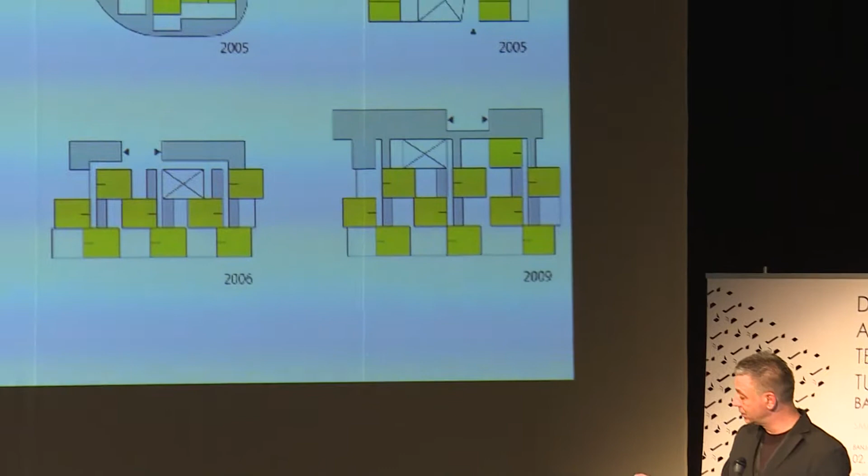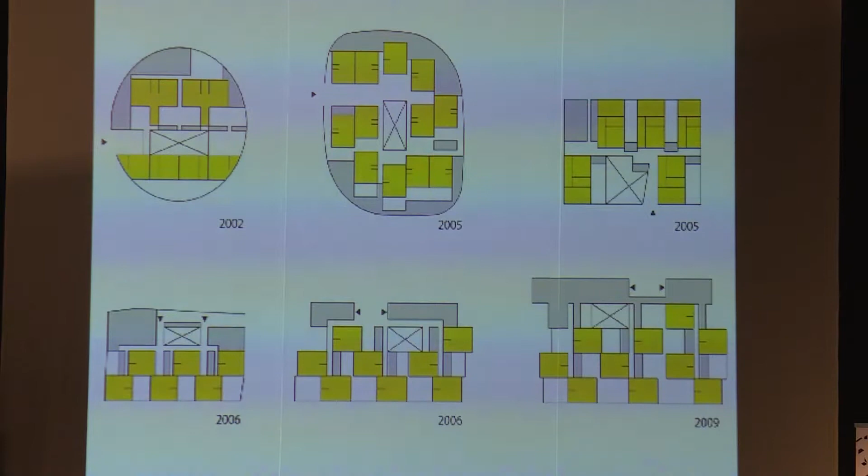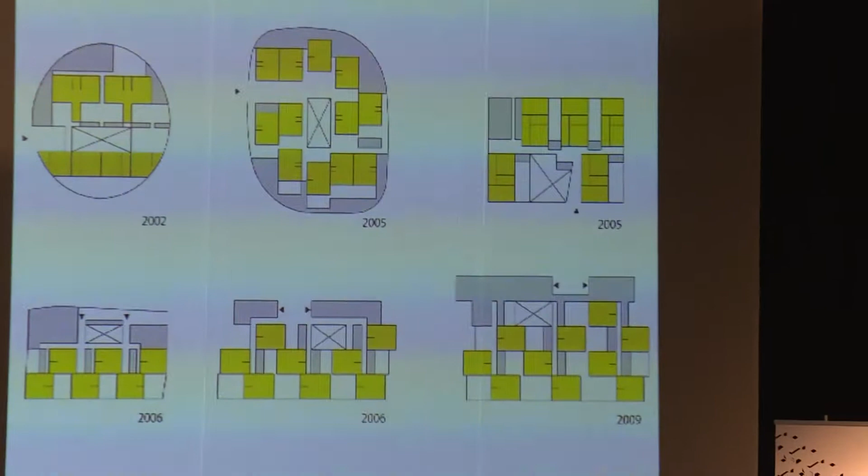We did a lot of projects for kindergarten structures. Unluckily, only one of them was built, but this is a series of projects starting from 2002, ending in the first decade, showing an evolution of a type that consists of two colors. The yellow are the dwelling areas for the kids, and the gray ones are additional structures for grown-ups. The way we try to make it a theme is how we combine this, how we don't take one away from the other — how we interweave these two generations, these two worlds, into a more complex, friendly, and social textile.

This is a plan showing the courtyards and the relation of the units, with a semi-public space in between, and the space for the grown-ups, which is adjacent and slightly interwoven. I'll show more interweaving right now. The basic idea is not to take one part away from the other, but to make them more closely related, so these two structures are not divided but interwoven, in order to achieve different social relations.

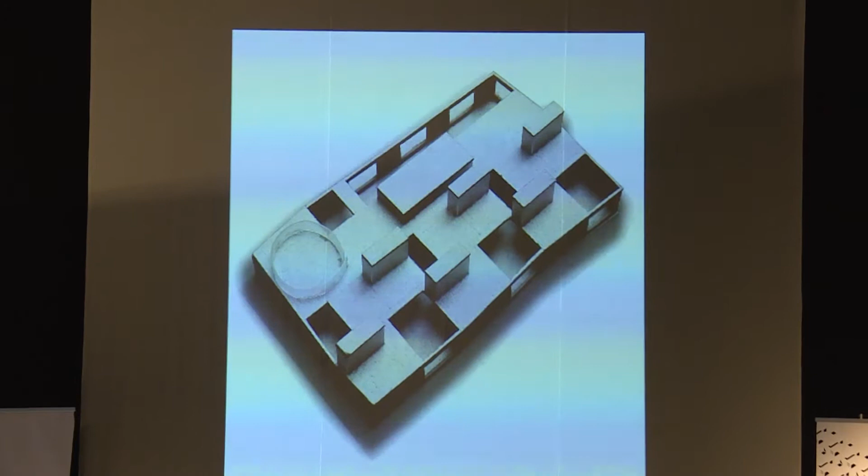Again, the idea of courtyards and the units in a relatively small lot in Zagreb. This is the volumetrics of this, and you can see a kind of relation of the units and the spaces for administration, how they're related all around these courtyards with a multi-purpose room in the middle, and so on. This is a kind of another study on how these roofs could look.

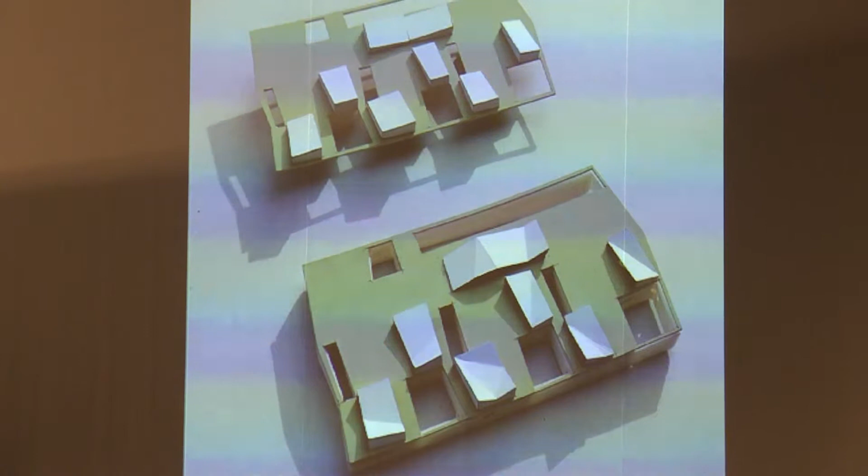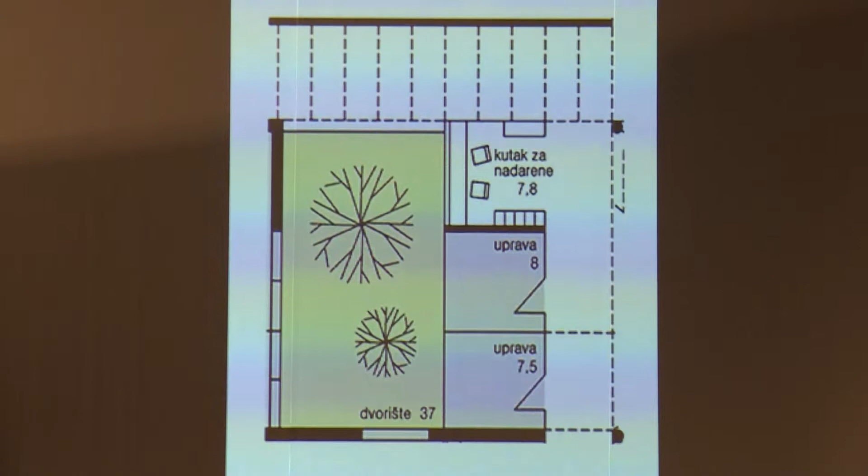Fourth type, as you can see, is somehow an evolution of this type that we started to develop, to see how these courtyards can work between each other. The idea is also a kind of relation to Hertzberger, how these gifted children can have a kind of niche, a special place where they can have their own programs, and they are still related to the unit. So it's also a kind of structure which enables us to play different scenarios and different programs.

So this is how this volumetrics looks from the outside, and this is slightly different because it's for a rural setting.

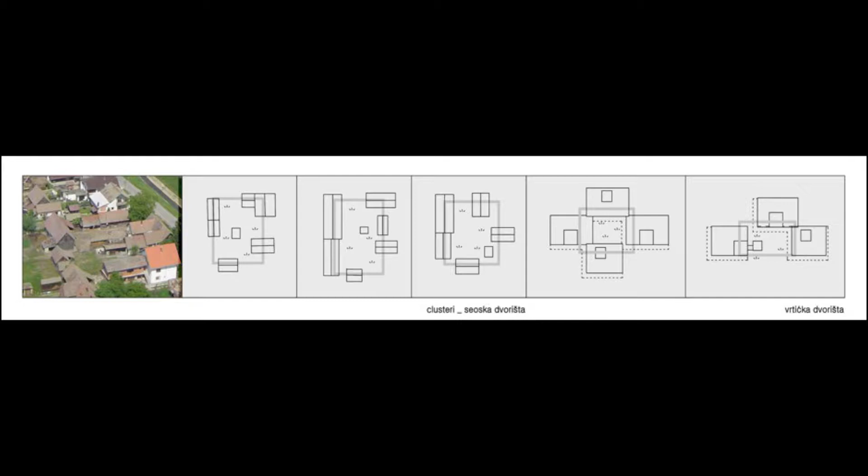So what we tried with this one in Kutina, it's a kind of semi-rural, semi-urban situation in Croatia. We studied these rural structures, how they are organized around the courtyards, and we evolved this into a kind of kindergarten type. We also studied the roofs — the terrain is sloping, so these canopies somehow follow certain patterns that are embedded in history.

Little by little, we try to make this dialogue between, let's call it, the modern urban and the rural things of the past, which slowly go away. So we wanted to somehow have this organization of urban and suburban in the same project.

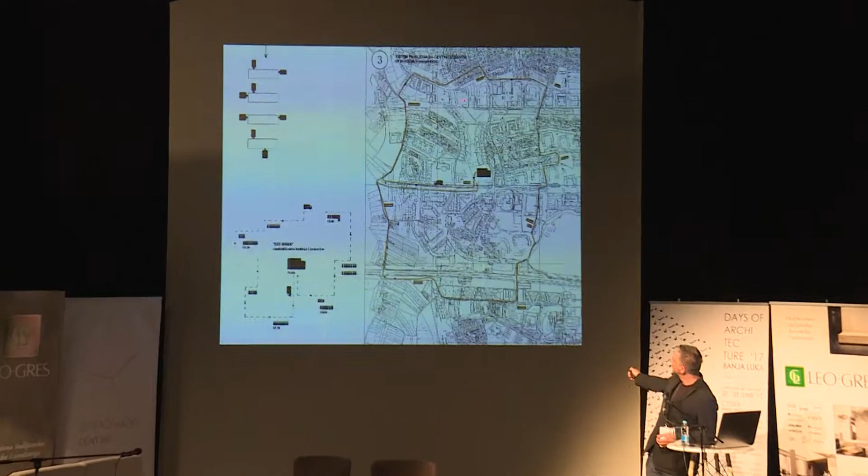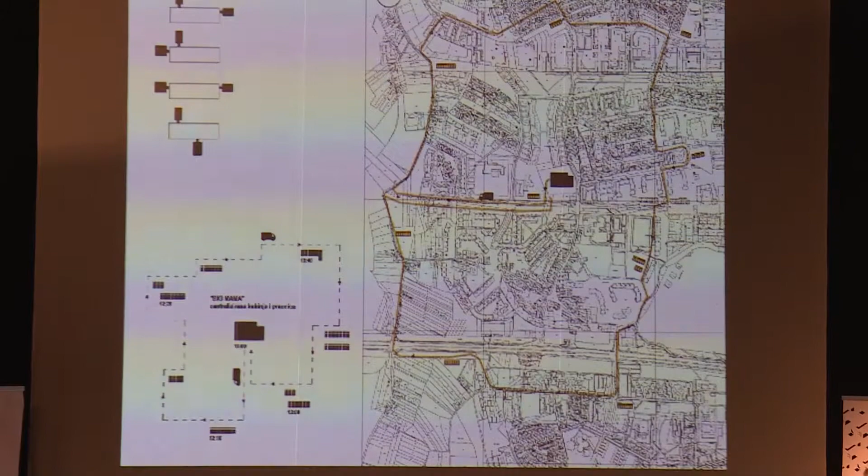It's in the west part of Zagreb. There's a bus, there's a lorry which distributes food, and all these small-scale structures could be easily assembled on site. Basically, the idea is that we have this wooden structure, and we have these two plug-ins with all the technique, and the multi-purpose hall as something you can plug in by demand if you really need it.

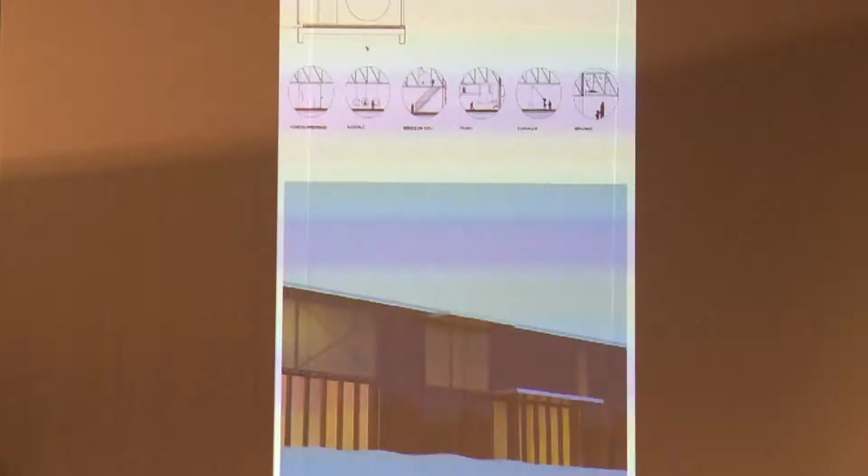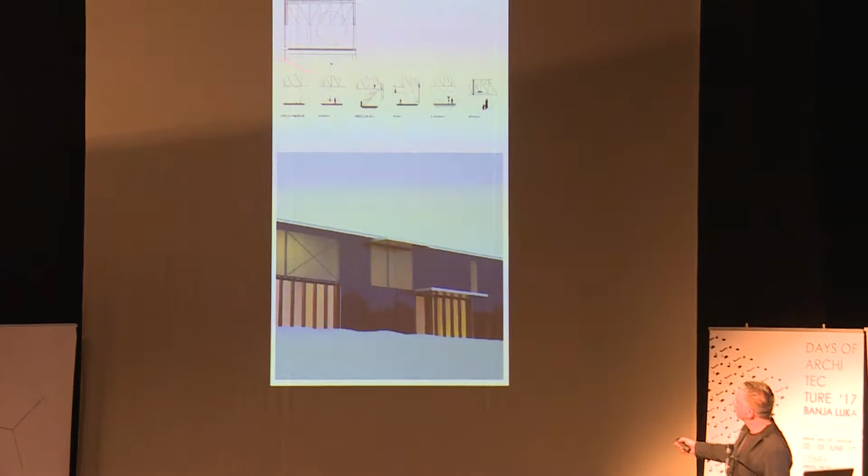This is a kind of more poetic settlement of this kindergarten in a landscape, and we also use these huge trusses in order to play different scenarios of how these kids' units could be used.

Some more about the structure and the whole assembly of the building, and how it can look in a more natural setting. Finally, we come to this one that was built, somehow a part of this series, done in the eastern part of the city on the lot where the old kindergarten existed.

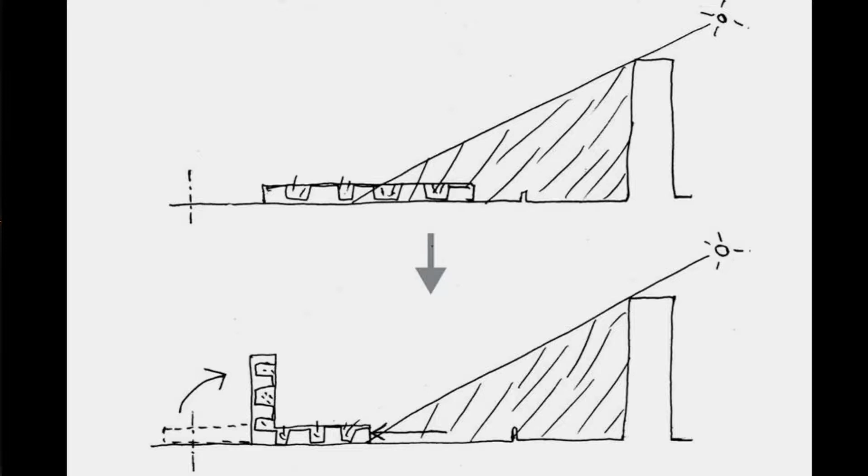You can see the huge building here casting pretty big shadows for most of the year. So what we try to do is organize this pad with all these structures, but as you can see there is a shadow, so we have to push this pad away from the shadow, but unluckily we arrived at the end of the site.

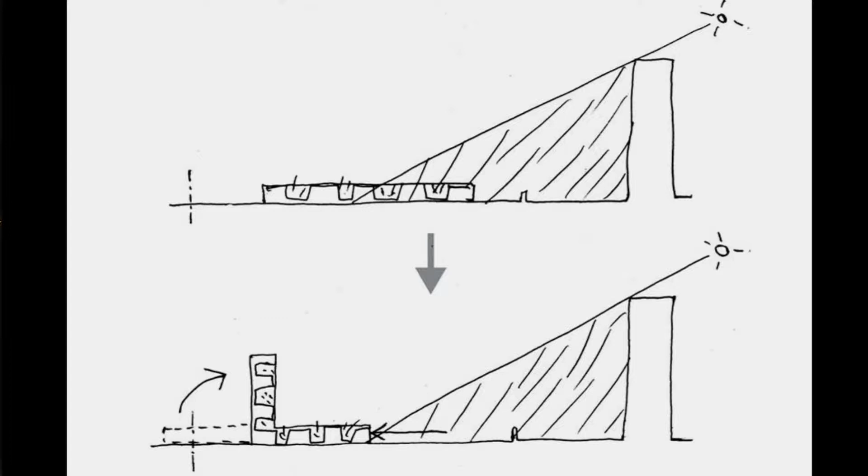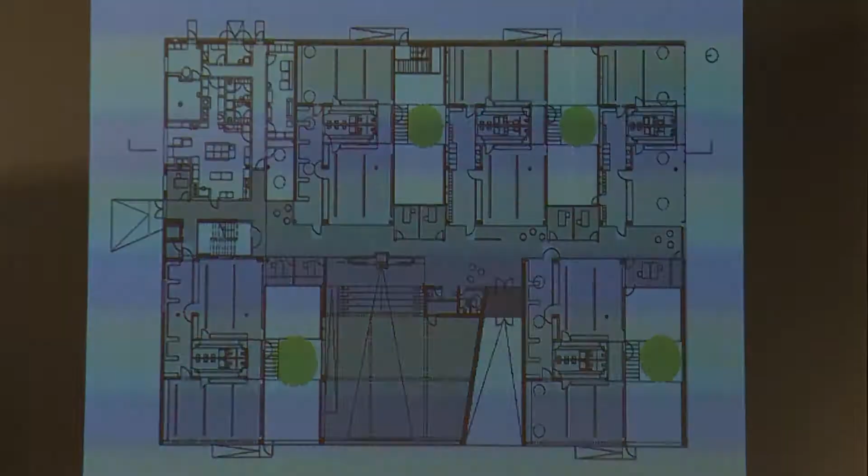We call it the kids' or children's street, because when kids stroll along this street they can see a woman typing on a typewriter, another one counting money, the third one sewing on a sewing machine, the fourth one cooking the meal, the fifth one mending some furniture.

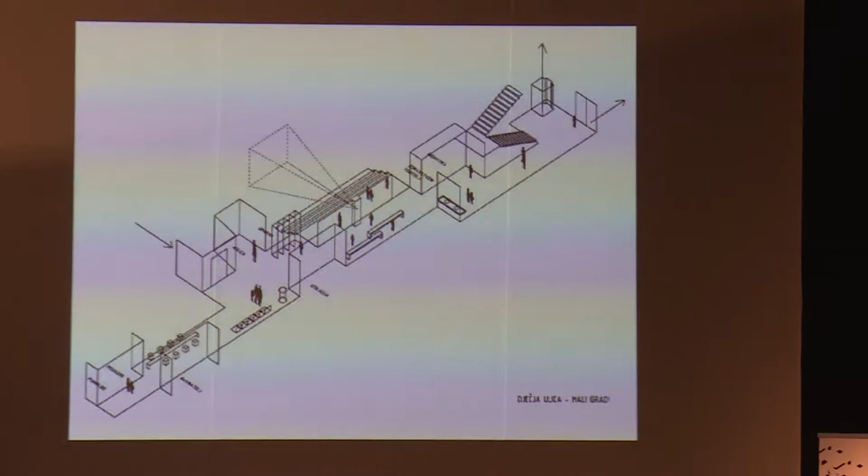So this is the idea that the kindergarten is a kind of didactic device, not just a building, but a didactic device where kids are brought by the grown-ups into a simulation of real life, like walking along the street and seeing all these professions left and right, talking to these people, having some sort of relation.

This is how the socialization in this kindergarten could work. And this is a few images to give you an idea how this transparency of these slabs works, in order to relate the small ones to the big ones.

We even used it as our Christmas card for 2008.

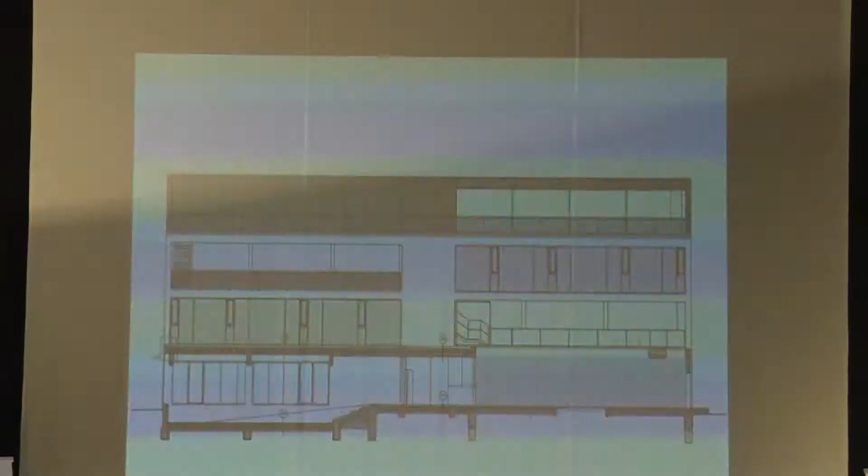Some more exteriors, some more sections. We even have it on the cover of our 2G magazine, this kind of winter scene where kids can play in secluded loggias or balconies.

We use this indigo color, relating it to the indigo children. We don't have time to talk about it in detail now, just a hint — if you have interest, there is a lot about it on the internet, what the indigo children are like.

Some more details — this is also maybe interesting. We deliberately left this part of the lot without a fence. So we are giving the city this kind of a park, like an obligation of the architects to contribute to the public domain. So this is not fenced as a private space of a kindergarten, but is given over to the park.

It was a very risky venture, and actually it happened because the people in the municipality didn't pay enough attention to what we were selling them. So this happened only by chance and probably couldn't be repeated next time.

So some more images from the winter. Now I will show you, I hope in a very rapid progression, how we deal with different scales and how we relate it to different programs, which are not kindergartens obviously, but other programs, and how we try to use the idea of scale or scalelessness as a decisive design tool.

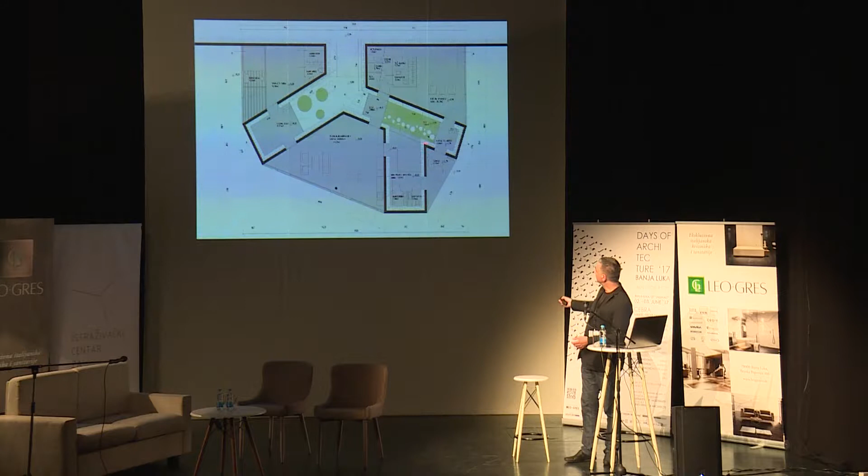To the outside, these places of concentration are somehow more inward bound, so we try to orchestrate the whole scenario of living there just by having this one single line, which somehow continues the line of these dry walls, as you can see them here.

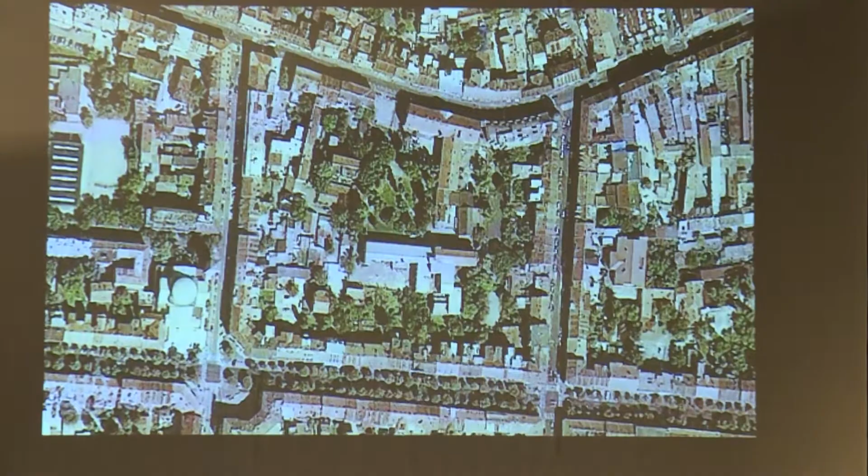The next one is the project for a little gallery in the city of Zagreb, next to the Academy of Arts.

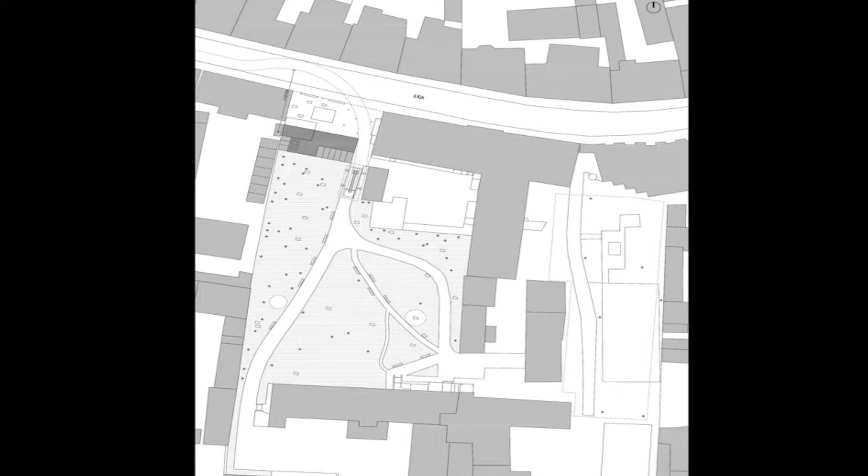This is the main street of Ilica, and it was a competition where we were asked what to do with this gap. So we came out with the idea — this is the gap seen from Ilica Street — to leave the gap open, again, to give this as a kind of extra public space to the street area, and to reduce the house to a very condensed volume, which goes down and goes up.

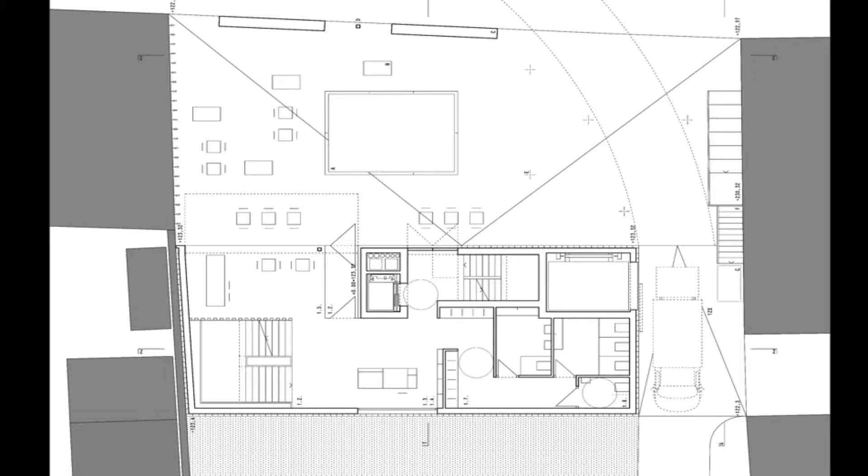So this is the plan. I'm sorry about the quality of the slides, but they should have been a bit better. It's a very condensed area on the ground floor, and there are some exhibition floors. Upstairs here is just a plaza, entrance into the courtyard. So this is how it looks like.

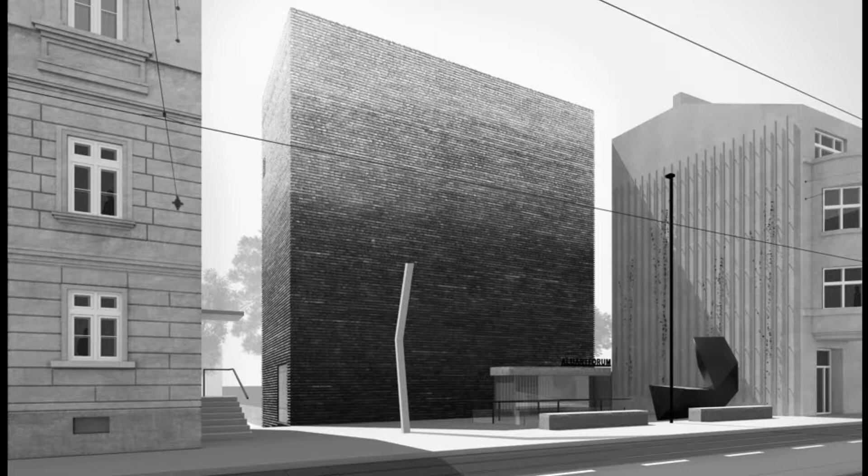It's a kind of a brick structure. As you can see, it somehow goes into white, goes into nothing. So this idea of tour sans fin, as Nouvel would say, is this single piece of brick with this very humble entrance, and this is the whole gesture.

Everything else is on the inside, and this is this plaza with some public art and the sunken atrium, like Mies van der Rohe, where from this plaza you can see the exhibits, and it also gives light to the galleries downstairs. This is the view from the lower part, looking up. This is the idea of having it very dark in the base and dissolving into the air.

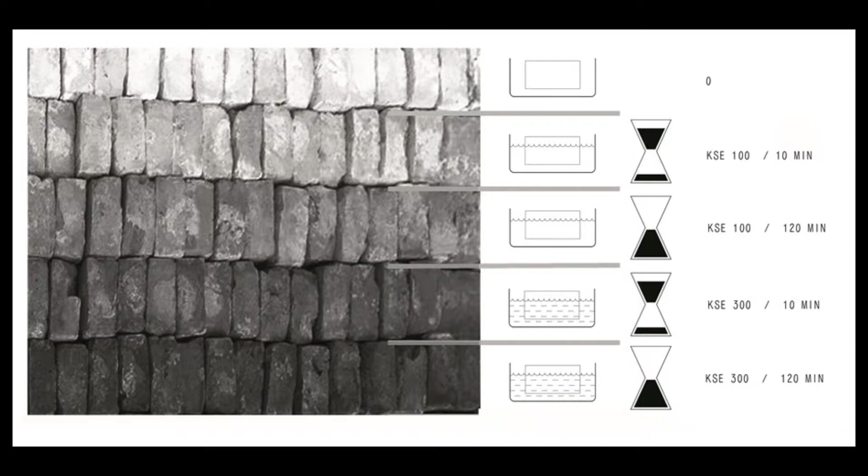So we try to use some special agents for the brick to make it normal, or to let the calcium penetrate it and make it more white. So the idea of imperfection of the bricks, we use as a design tool. We leave it to see in the future how these red or whitish bricks would perform. So this was the whole narrative of the facade.

So this is the rear elevation, and one more view from this Ilica Street site. The next one, some of you have visited it. I've heard it just now.

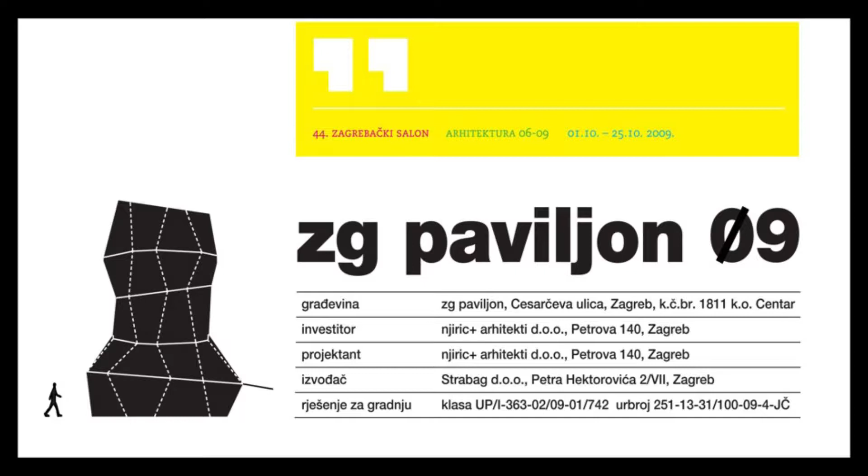It was our pavilion for the 2009 Zagreb Salon, where we, as winners of the former Salon, gave ourselves the right to build this pavilion, otherwise people just make exhibitions. So we said, let's try to start a new tradition that every winner of the previous round makes a little pavilion as a kind of statement of Croatian architecture at that particular moment in time. So we have chosen this spot, and we are still positive about this becoming a new tradition.

Just next to the main square is a kind of meadow which is not so used. It is next to the cathedral and has a very direct relation. We thought this could be a nice spot for this building, which has public access, and this lawn is really not used. So we tried to make it here.

We don't have time to go into the narrative of the film, but somehow this is the idea of these prefab things which can go wrong, and the idea of the aesthetics of ugly, which we found very important in architecture. So we tried to make this monster and ask what is the most dominant material in architecture in Croatia at that moment.

Plastic windows and rendered facade, we call it demit facade. I hope you're familiar with this term, demit. So demit is something architects really despise and hate, I hope you agree with me, and plastic windows as well. So let's make this pavilion with these two mostly hated materials, and show that they still have a certain power to be articulated as architecture with a big A.

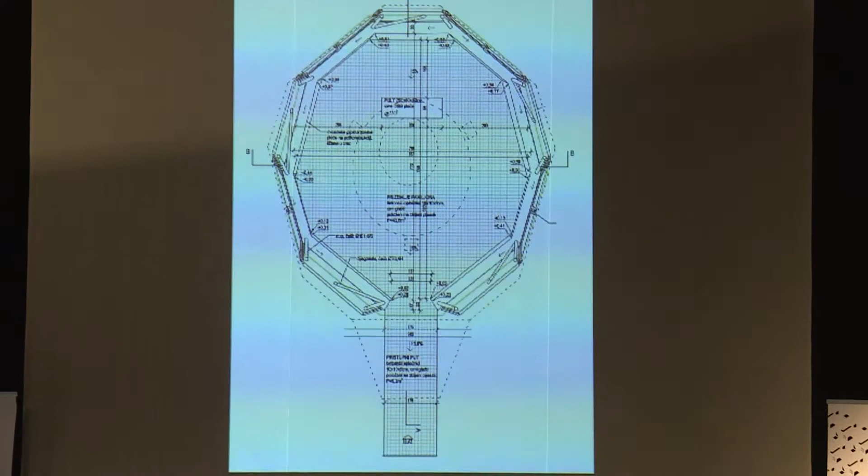So this is a kind of plan of this structure, some section. None of the windows are the same. This is the assembly process of the steel structure, building it, as you can see, and situating it next to the cathedral, and this is how it was finished.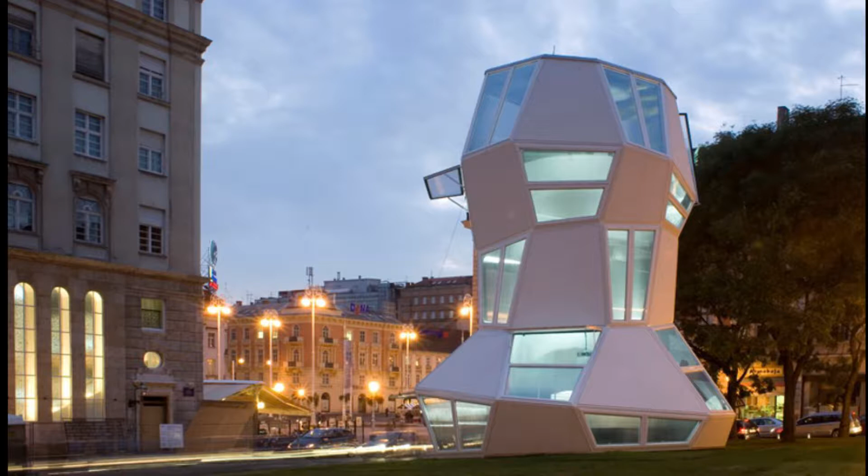So it sits peacefully. There were a lot of different events happening inside related to the happenings in the main square, so it stood there for 3 months. In the interior, we have shown this film as a kind of idea that some of the people, not all of them, could have this relation from the narrative of the film related to the very pavilion.

So these are some views from the interior. This is quite intentional, this idea of a pulpit as if this were a little church, so this sort of almost religious setting is quite intentional. Next to the Big Brother, the cathedral, we have a very specific relation to the Catholic Church in Croatia, so we wanted to make a little comment on that, to work with some stereotypes and cliches.

Some magical appearance when it's lit, some different views, and so on.

Okay, now we go to the middle-sized projects. I hope we are okay with the time, are we?

First I will show you what we call campus in Split. It's a very strange campus with a lot of illegal building. It's very inclined. It is an idea from the 80s, the so-called Split 3, as a kind of diagonal, which is not really taken as it should be.

This is the Faculty of Architecture here. So this was a competition for a new Faculty of Law. We tried to see how the whole thing can work out.

We don't have time to go into detail, but this is the position of the house. We call it the house with 3 courtyards, for 4 different reasons, climatic and organizational.

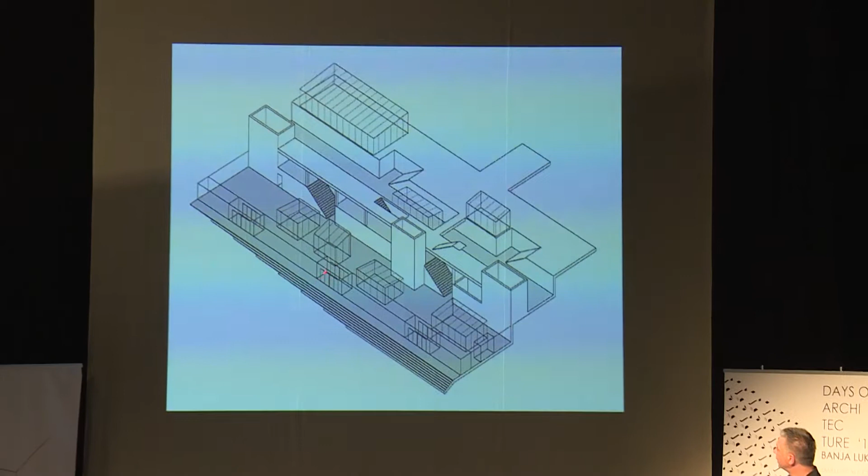On this sloping terrain, we make the parterre or ground floor as this sloping, stepping-up structure, like a parterre that happens on 3 levels. You can see it here how it goes up, because it's a pretty steep sloping terrain.

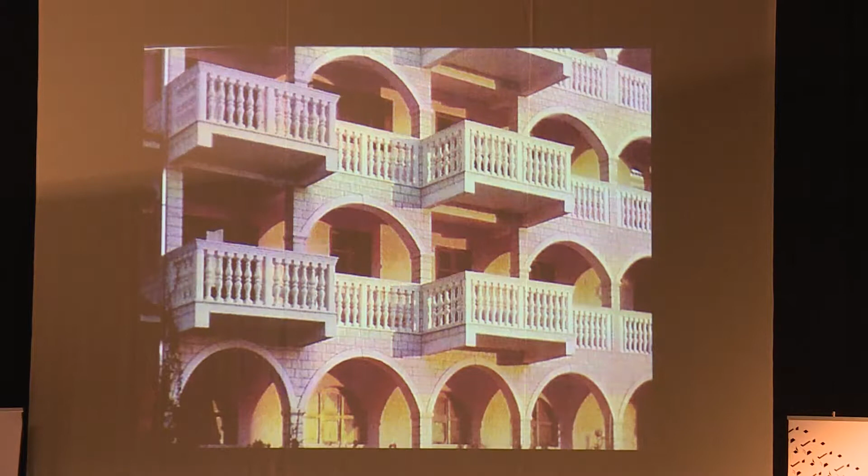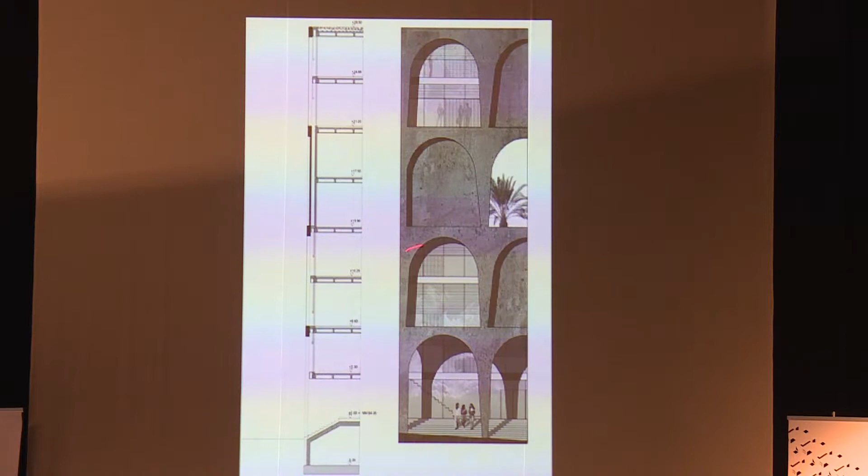Some plans. In Dalmatia, the more arches you make, the more money you will make with your house, because it will be attractive. It became almost like a trademark, so people try to apply them wherever they can. So we say, why shouldn't we go with the same banal idea, but let's make them double height, and let's see what happens when we use this as a pretext.

There are also these Roman arches, which have been changed over time by everyday people. They punch a window, they put an air conditioning unit here, things like that, but it still somehow does not compromise the strength of this primary Roman structure. So this is a lesson we learned and try to apply to our project.

So this is the most important diagram of the project. We have these arches as a kind of disciplined structure, and we have the infill, which can change over time. You can close it, you can put a staircase somewhere else. This is a structure that really can change in time.

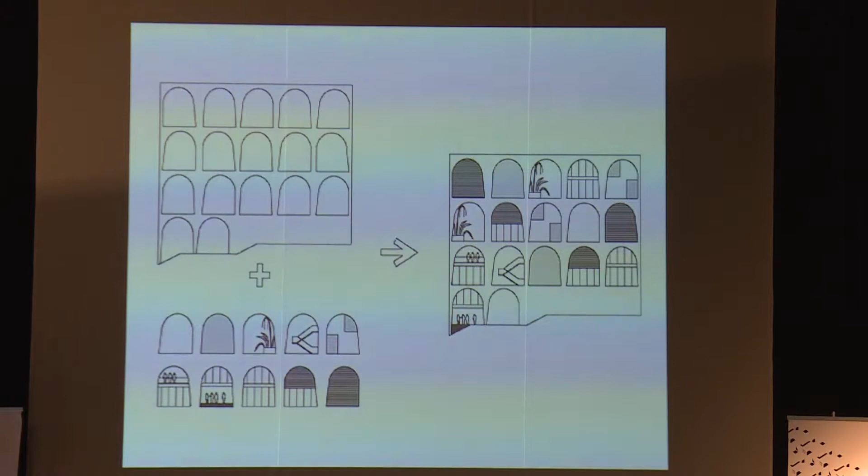This is the idea that architecture does not work as a petrified entity or a fact, but is somehow a procedural living organism which can adapt to the very needs of its users. So this is the message that comes out of this project.

We use some ready-made, banal structures in order to make it more related to the context we have to work with. So these are the plastic boxes that we put into the interior, and this is an exterior view of this structure, also with these gardens protecting from the sun.

So it's a beginning of something that we later developed as sustainable architecture. I would eventually call this a proto-sustainable project, which somehow tackles these things, but on a very primitive level.

Another faculty is a competition for a pharmaceutical faculty in Zagreb. This is just next to the main cemetery, a nice virginal plot of land next to the botanical garden, which also belongs to the faculty.

This is our second iteration of this competition. We came third 15 years ago in the first competition, which was published all over the world for some reasons I really can't understand, but obviously it was interesting for someone. Now, 15 years later, we have to face this site again with some new ideas of how we can work with it.

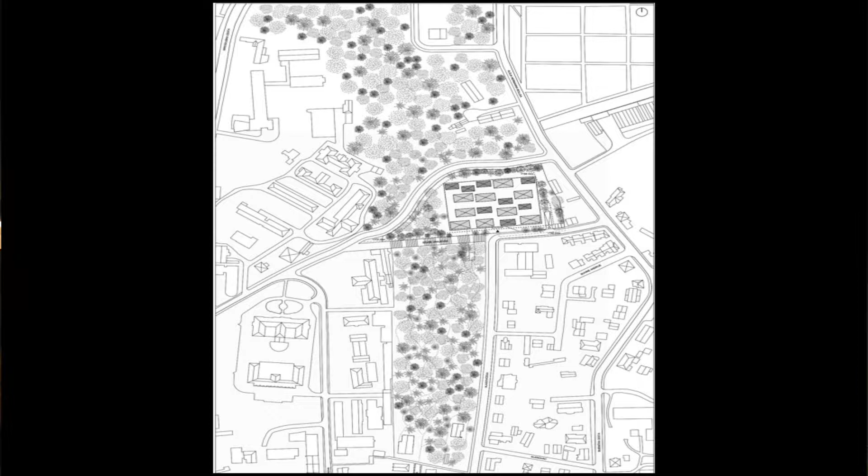This is the idea of how we can frame the nature in this given format, relating to referentials like Paul Klee - the castle in the forest is the name of this painting. So we tried to simulate this artificial forest that can also become part of this forest-like structure. We plant some sort of artificial things there which can serve a number of purposes.

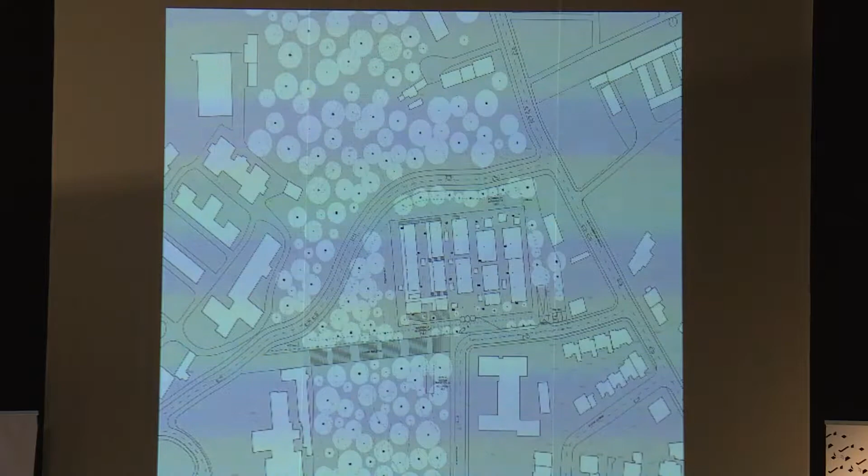We also have references like Frank Lloyd Wright, architect Corrales in Madrid, and Foster in Spain, as a pretext for our structure, and we put our pavilions within these structures like little pavilions in the forest. So we have these two entities.

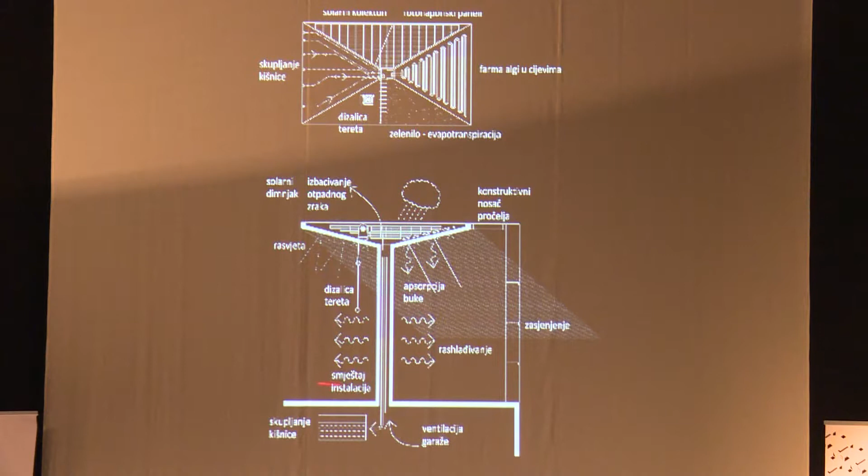First we have these mushroom-like columns which perform a number of sustainable functions, but also have structural properties. It carries the roof and the elevation, and within these we have the pavilions. So this is how it looks from the outside.

Some technical details. This is how these pavilions are on the slope. It's important to note that the terrain is sloping as the natural terrain slopes. So this line of glass is not really stopping anything - the terrain flows into the house. It's a continuous sloping structure, juxtaposed with these pavilions and with these mushroom columns which carry the whole structure.

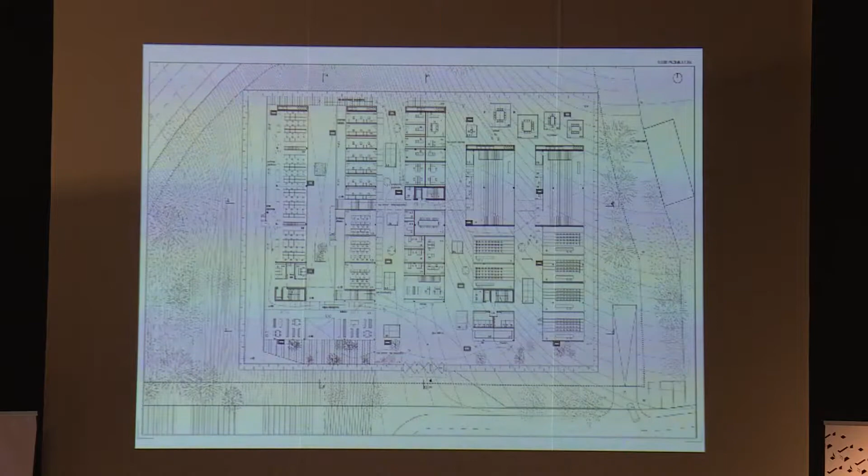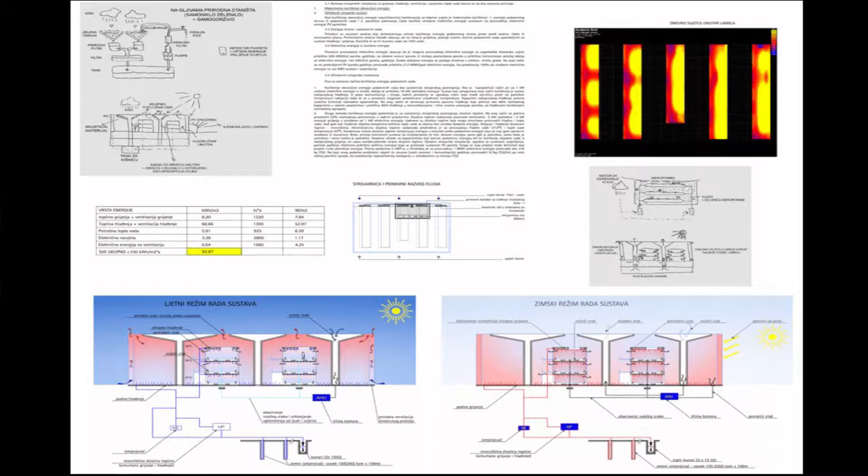Also some sustainability issues. I will come to that later in another project, but since let's say 2010, we started to deal with sustainability on different levels and different scales. We work with a Serbian firm from Belgrade called NTech, and we have really a very reliable support and partnership with them.

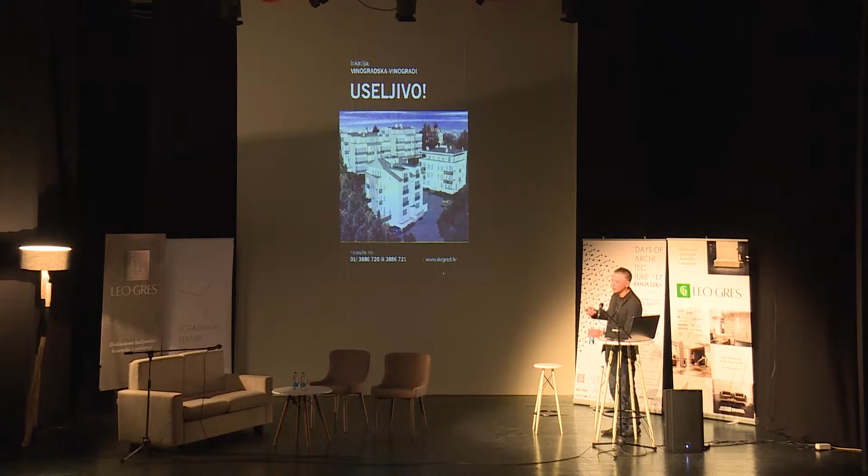So this is the finishing image. Now three residential structures. This is how people try to build in Croatia, and they somehow flatter these structures by calling them urban villas. It's easy to show that they have neither the urban character of the place, nor a house or villa-like private setting, but are simply accumulations of building material, as I call it. So how do we cope with that?

Another project was a very interesting competition for the gypsies in the city of Zagreb. The city found this plot just next to this completely illegal gypsy settlement. It was a kind of virgin plot of land, but the gypsies, as they do, didn't know there was a competition there, so in the meantime they built some houses. It was a very cynical brief for the competition, saying: erase these houses, take a bulldozer, take it out, and make a cultural center for them.

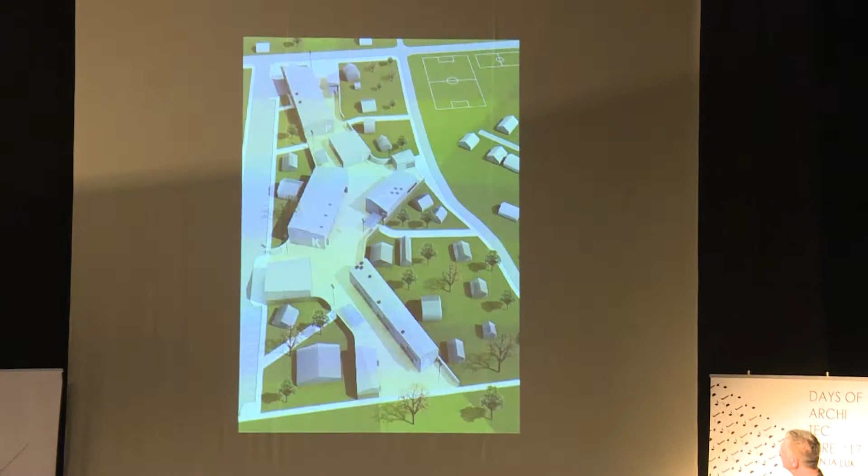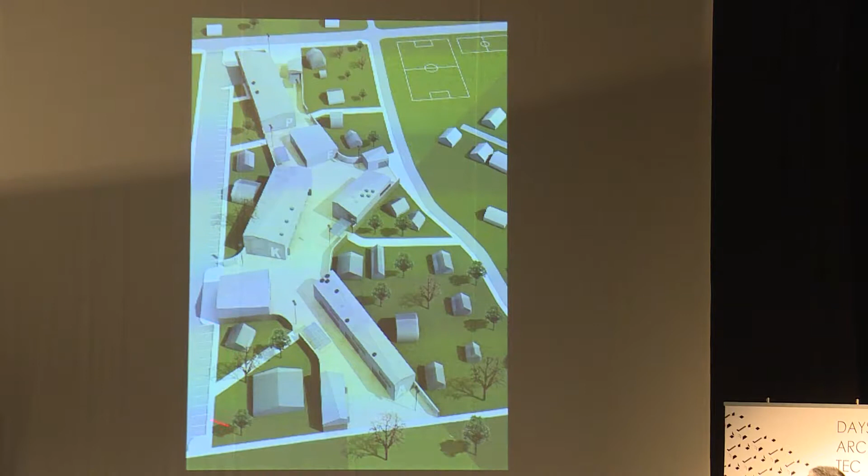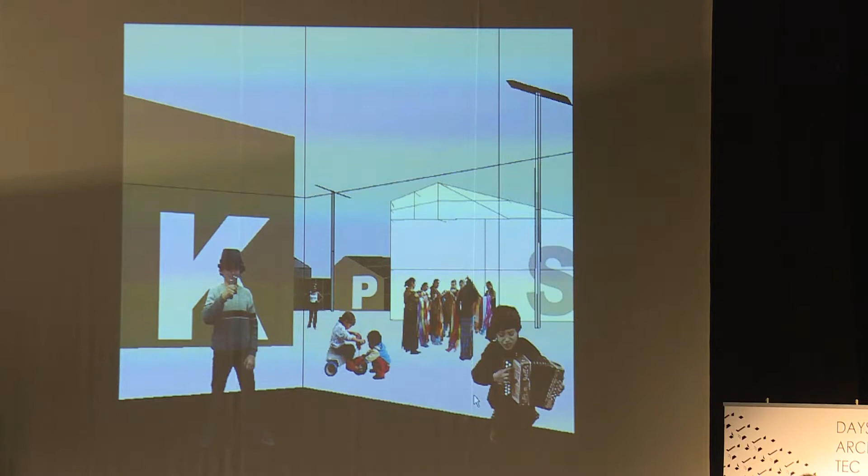We somehow inserted this public program within the residential structure — maybe it's most obvious in this image. There are very simple sheds that you can buy in a store, install there, creating a relation between this wall and these more private things, with emphasis on a public space articulated between the houses. This is most important because gypsies have this very traditional way of living and celebrating, so we thought this kind of relation could be appropriated for them.

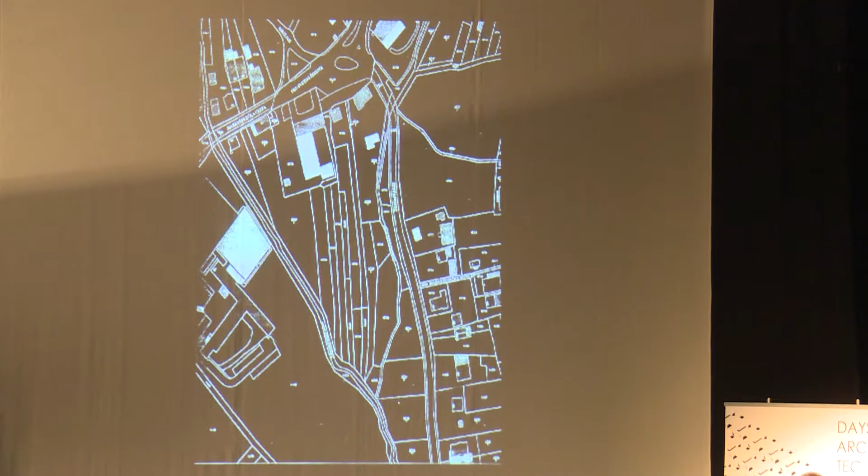Final residential project, in the outskirts of Zagreb, in a very nice setting between two river flows. There was a piece of land — again, the client wanted these blocks, but we said no, we'll make some clusters instead. So we worked with this semi-detached housing type.

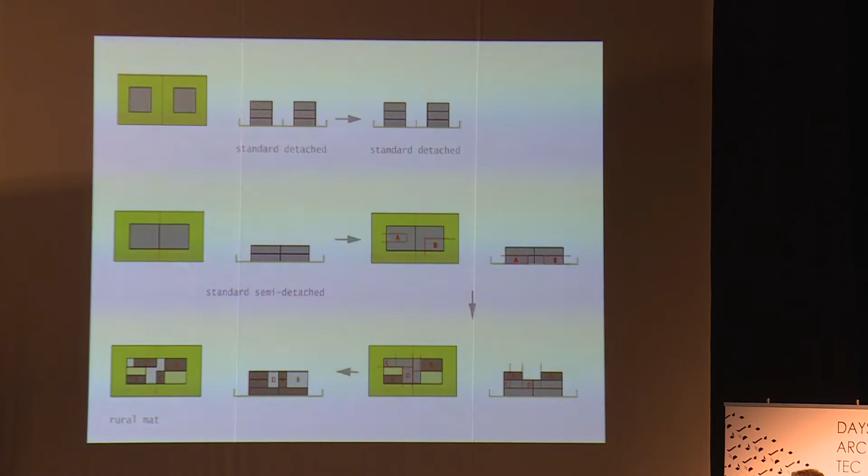We reworked it into something we eventually called rural mat — rural because the setting is rural, mat related to the famous theories of Alison and Peter Smithson, something very compressed, with a clear perimeter, inward bound and repetitive. These are, according to my reading of the Smithsons, the most important parts of the mat building. So we tried to work with them, going from this archetype into something different but somehow reshuffled.

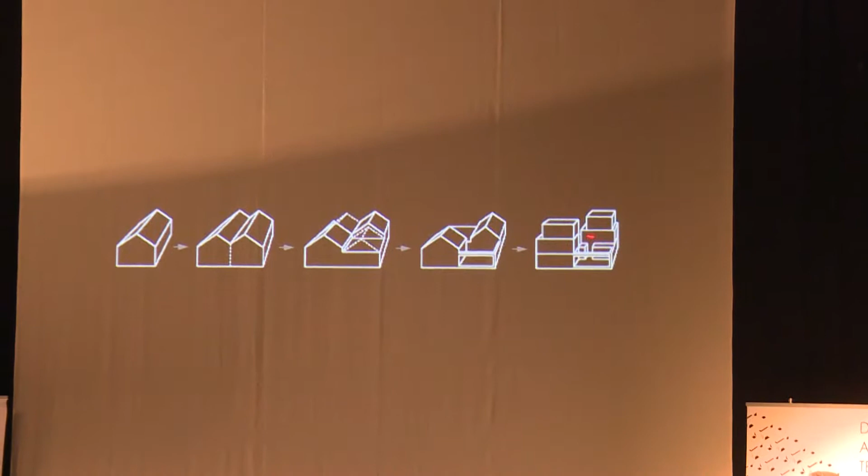So this is one of the clusters, also emphasizing free space since it's still part of land outside the city. We have terraces, atria, and gardens on the outside — a variety of open private spaces related to this single family housing in a group. We compress and condense the qualities of single houses into a more condensed and compressed structure, also with some carports to take half the cars away from the street.

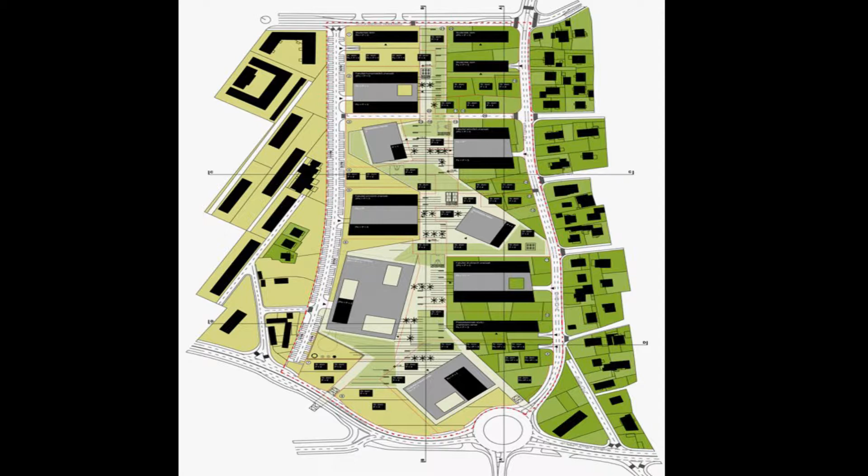So we won the competition for the campus and for the library, somehow trying to see how we can get these scales on that side, these modernist slabs, taking them here, and these sort of a single family house structure, taking them into little towers of residential character, which would enable this campus to live 24/7, with some public space in between, and so on.

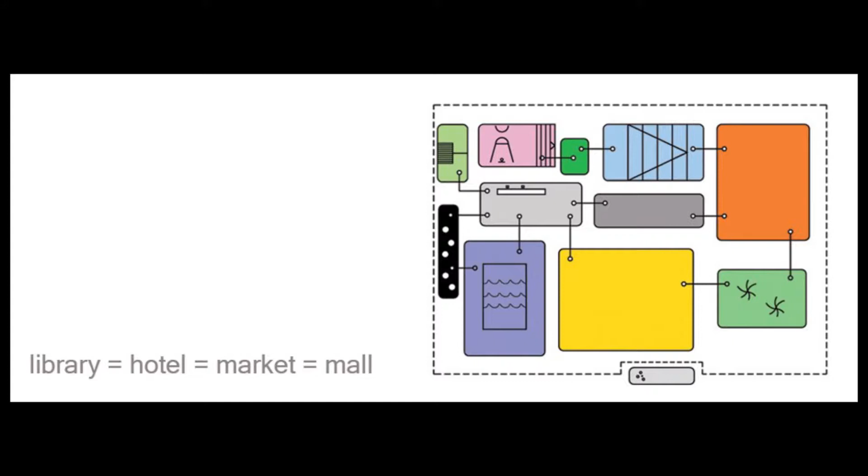I cannot go into the detail. This is the idea of the library, this old Rossian idea that the public house that looks nice could be anything, just like a collection of nice spaces that after becoming obsolete as a library can become a hotel or a market or a mall, or you name it.

This is the structure. We have this heavily installed perimeter, we have the library, and we have these punched holes, these atria, entrance atria, and two more.

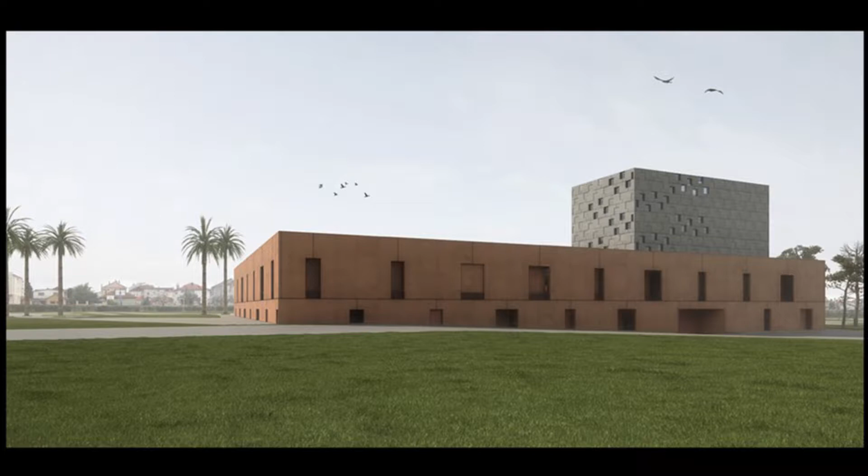So, and this is what I particularly wanted to show you, because we see it as a kind of a scale-less structure, because you cannot say how many stories you have, how high it is. Is a person high like that, or high like that, or even smaller? So we like this idea that this building has timeless and scale-less qualities. At least we hope so.

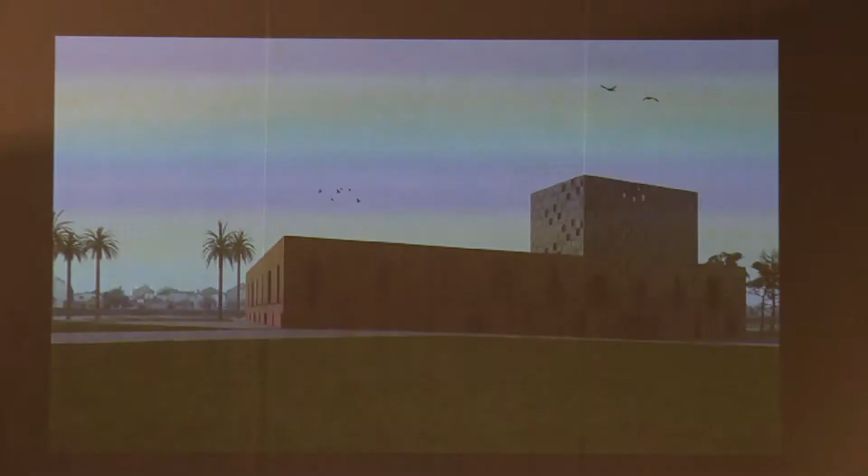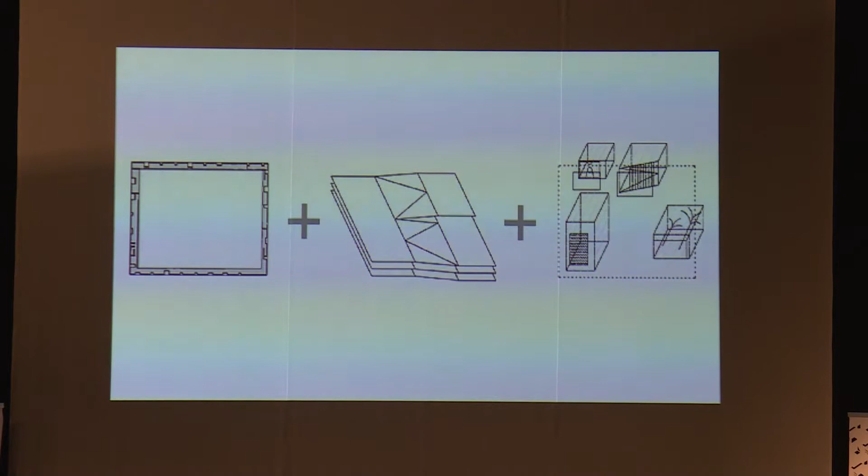Here you can see this thing what I told you already, the perimeter, the sloping structure of the library, and the atria, which somehow give light and provide enough lighting in for the reading purposes and things like that.

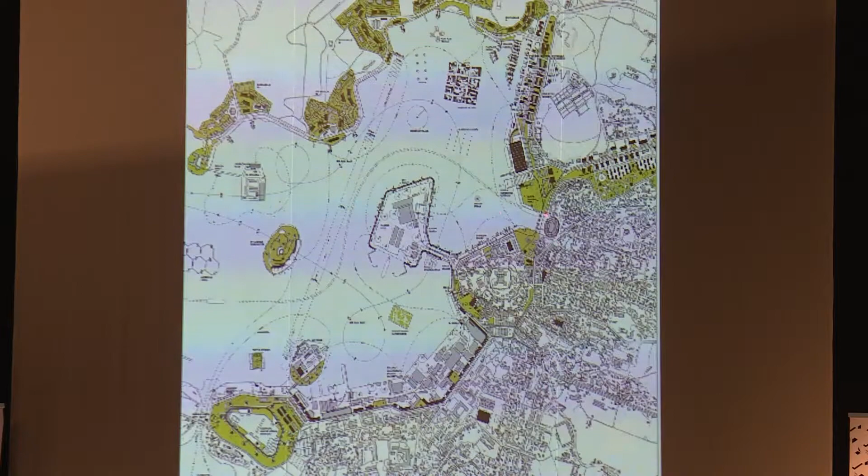But we thought that it would be more important to have a kind of encounter with the whole city, and the idea that we can use the water as the site. So our site is not just the solid ground, but also the water. So we try to treat them equally with a lot of different scale structures, small scale, big scale, movable, fixed, also with this existing shipyard that has to be remodeled, with a lot of things, relation to the Roman arena and things like that.

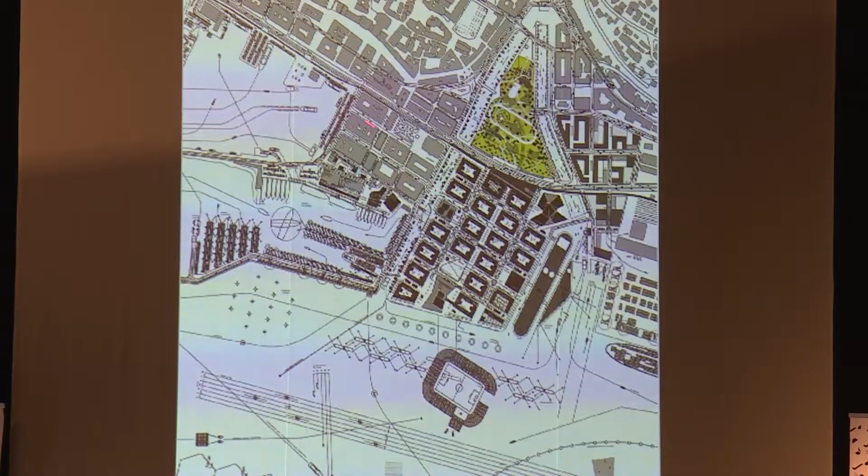So this is the first one. The second one is a city in Rijeka, a new delta complex, where we try to make a piece of a city related with these blocks that somehow reiterate the idea of a typical Fiume block of the 19th century. And trying also, with a lot of different structures that I cannot go into detail now, to equip the whole part of the city with sufficient things, not to forget this huge sewer plant which has to be removed from here into a kind of floating structure and things like that.

And the final project that I will show you tonight is a project that actually deals with the biggest area. It has 90 hectares. It's in the city of Zagreb, and it's a new university campus. We won the competition in 2011, made the UPU, the master plan, in 2013, and the first competitions are being held just now. So it's also a kind of former military land, which has been given over to the Republic of Croatia.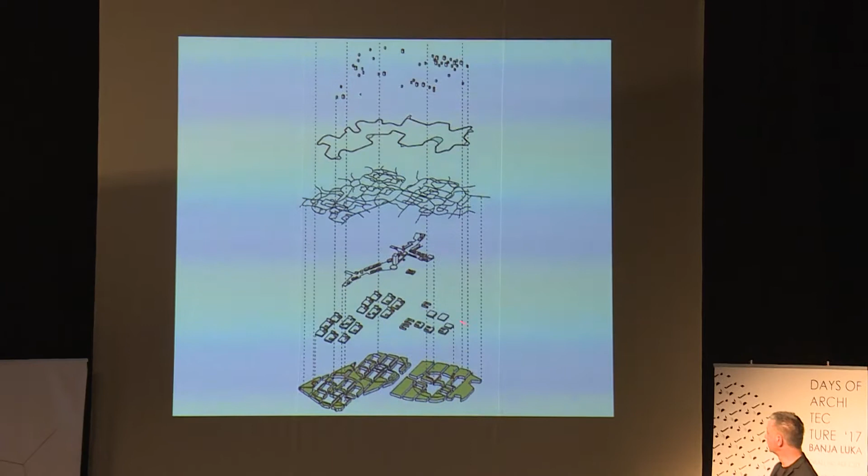So these are the layers of the project. When you have such a 90-hectare site, you have to work with auxiliary things like layering: the clusters, the public space, the paths, the waterways, the atomized little residential structures, and the forest, which has these climatic effects.

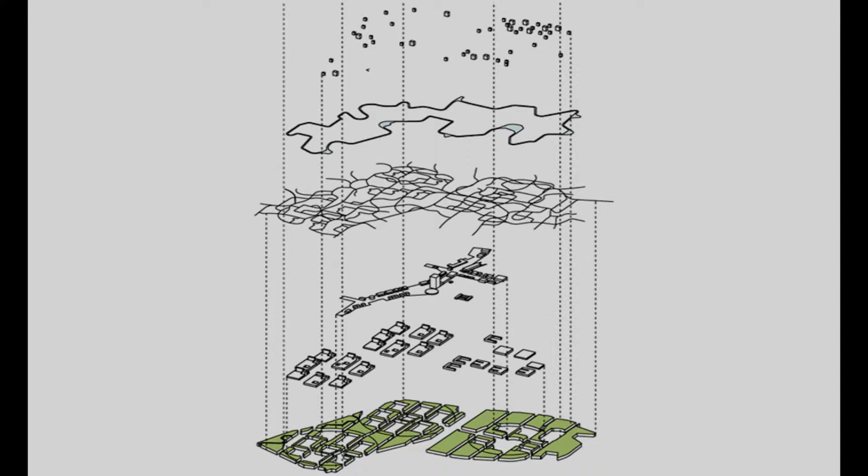This is the first project where we became aware that sustainability is much more efficient at the territory scale than at the building scale. In a building you can think about solar collectors, PV panels, maybe even wind turbines, but that's about it. In a territory, which is much bigger, you can apply certain sustainability rules with much bigger effect. I'll show you what that is.

This is the idea of urbanism as a sequence, a process. You start with the site, you grow the meadow, you grow the trees, you cut the stripes, you put the water, you start building the first cluster, you add a bit of public space, and you keep building until final saturation. So urbanism is not about a petrified image, it's more like a continuous process.

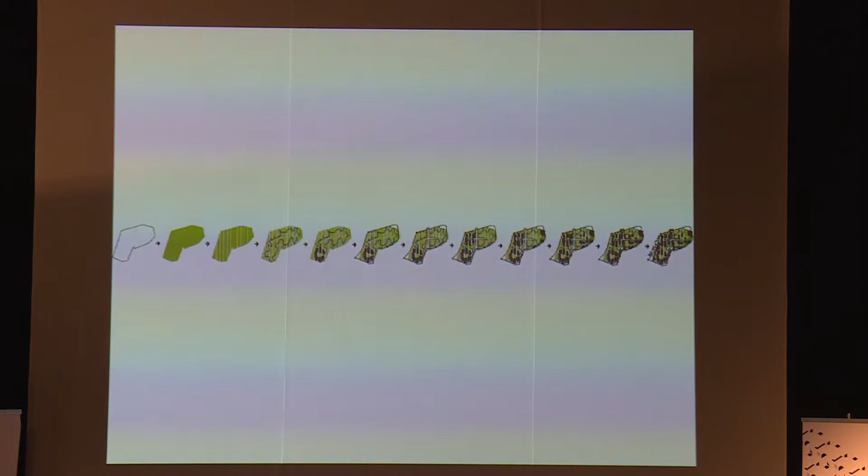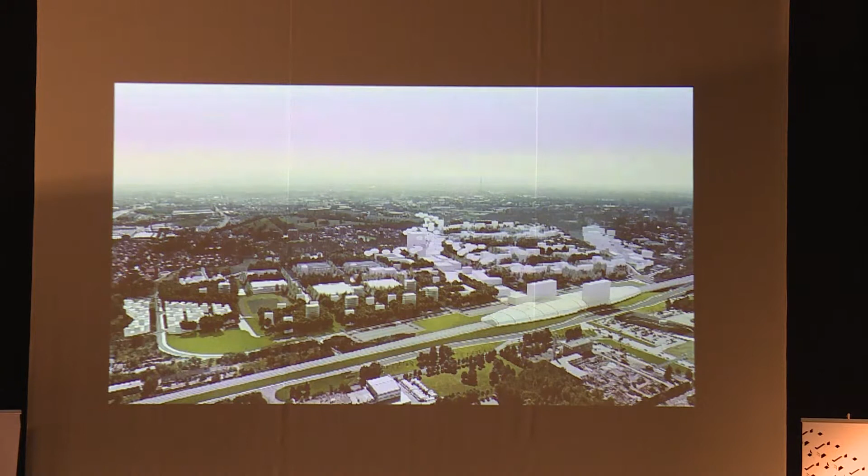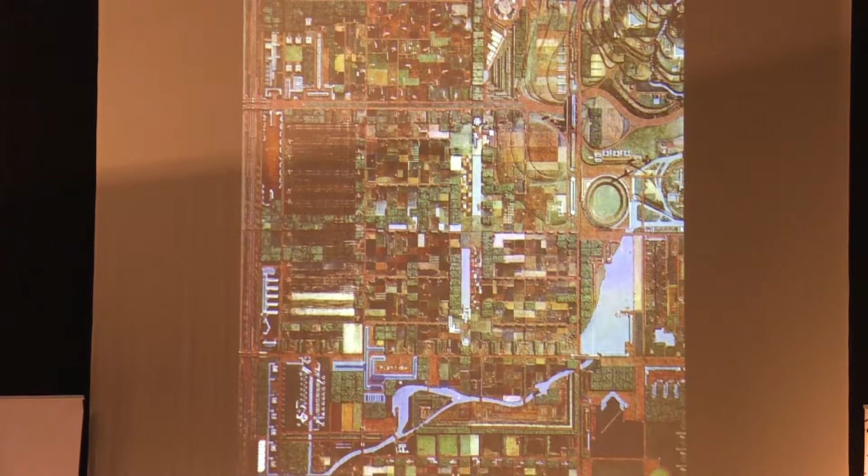The excerpt from the competition brief said: give us the future. We somehow tried to follow it by looking a bit at the past, particularly at this great project by Frank Lloyd Wright, the Broadacre City, which has this productive landscape that we also tried to suggest here — a crazy mixture of waterways, athletic tracks, clearings in the wood, wooden structures, clusters, atomized residential structures, and leisure activities, all happening in every quadrant.

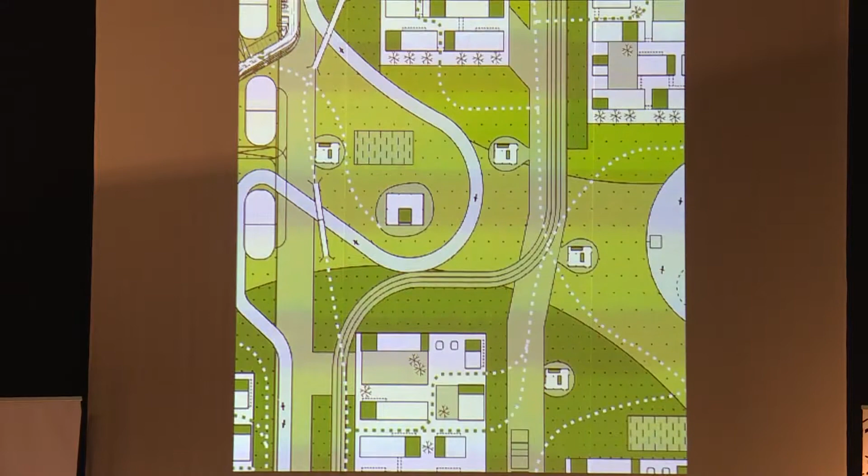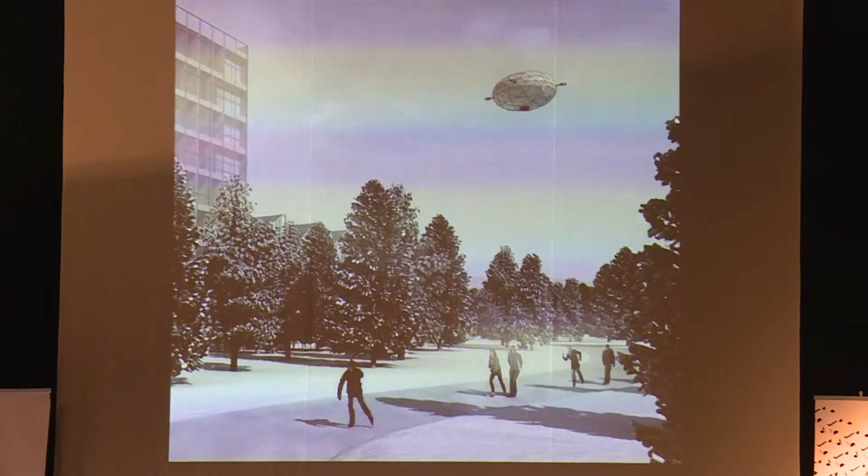It's a different story, in constant flux. You can use the waterways to ice skate in winter — you might ask what this curious object is about, I'll tell you just now — or you can paddle in this water in summer.

But then we come again to this idea of the scale. This scale is so vast that the houses really do not have any height, as you can see, and when you draw these little sections, they are so minimal. There's nothing like a landmark that you can use. So we invented these things, like flying objects, like flying clouds above this campus structure, like a flock of objects that you can navigate with your smartphone if you want.

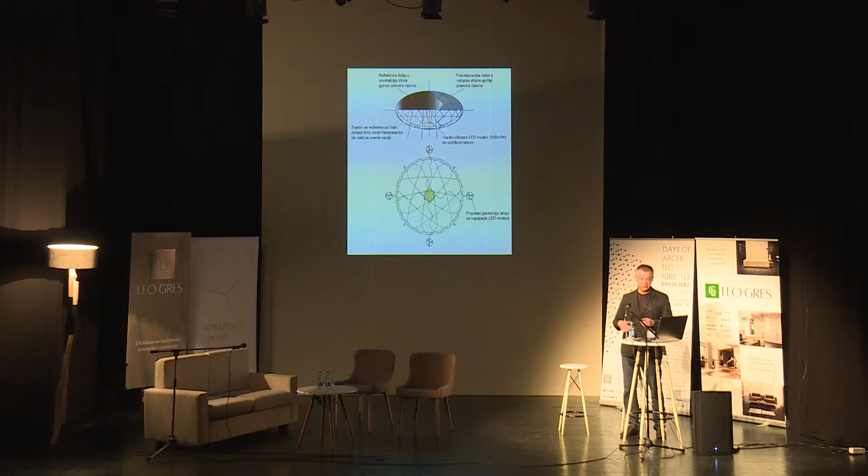This is this flying object, and funny enough, we found a startup company just 1 kilometer away from our building site who produces this for meteorological purposes. So we worked with them to orchestrate these flying objects to perform for us. They can provide light, sound, shadow, they can even observe like a big brother, they can perform a number of functions that we don't even know right now. But somehow the idea that you can organize this floating part of your urban layout was something completely new for us and for the whole competition.

And finally, this sustainability issue, we use basically different plantations in order to protect the houses in the winter with some evergreen trees on the back side, and to put trees that lose their leaves on the south side, so in the winter they lose the leaves and let this warm winter sun penetrate the clusters and warm them up as necessary.

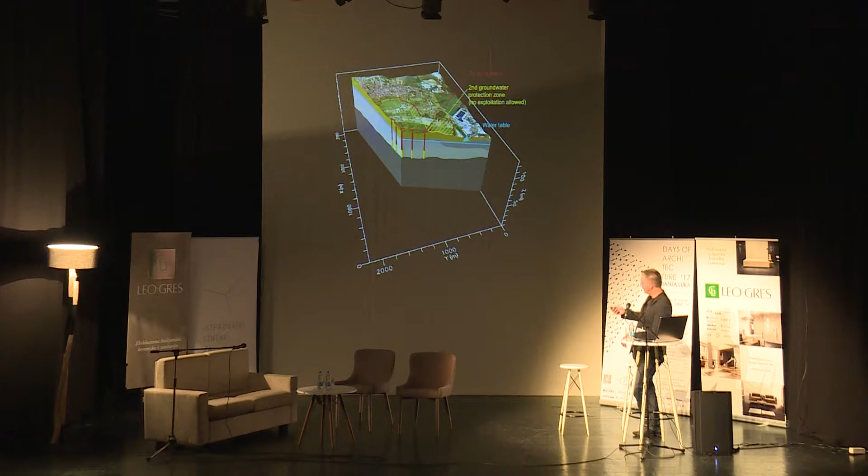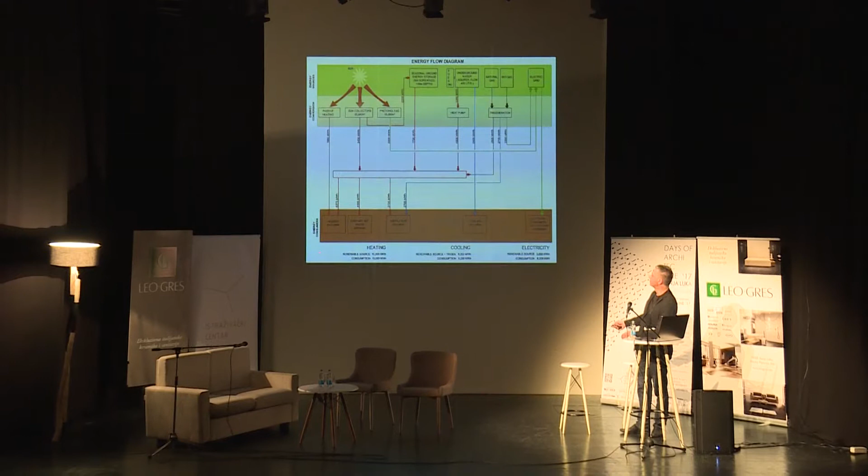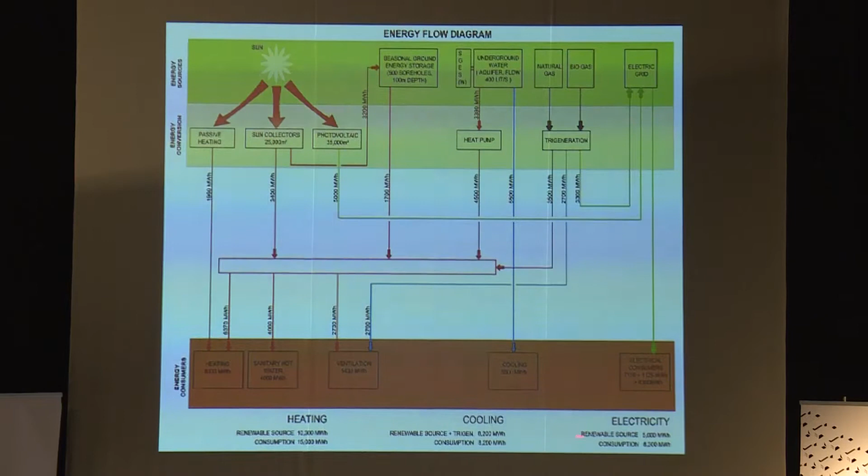And this is the most important diagram showing the orchestration of all these sustainable methods summed up. You can see that for the heating from renewable sources, we have almost two-thirds of consumption covered. For the cooling, we are almost there. And for electricity, we also can cover almost two-thirds of demanded consumption.

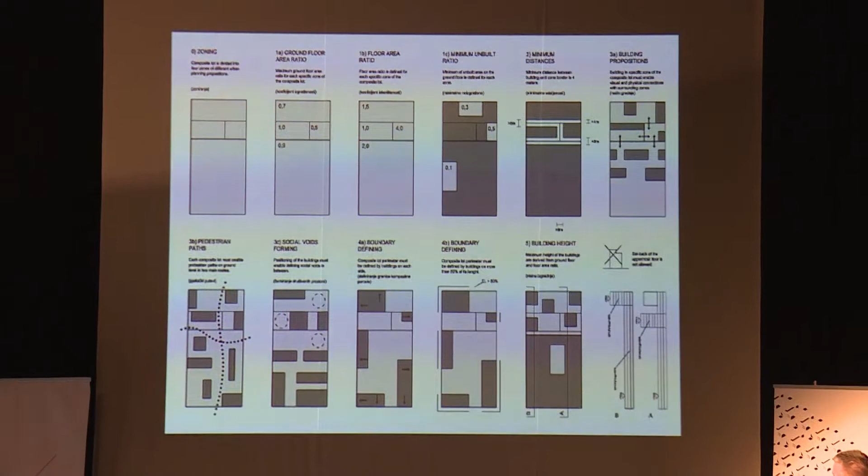So again, a question of scale. The bigger scale of this cluster, which performs like a flower by having 6 clusters, and within the cluster you have this smaller scale structure with the streets, with different ambience that are always different and interesting for the teachers and for the children.